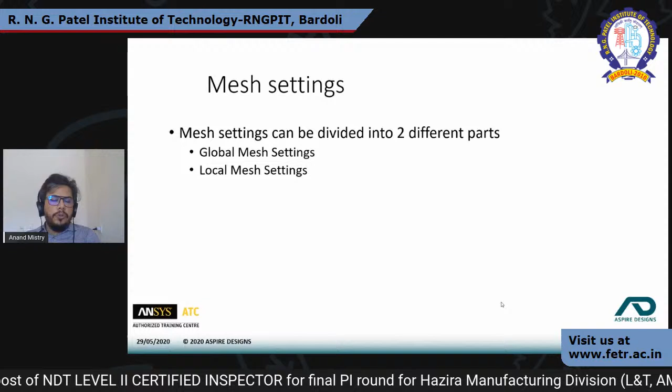We have it all. But as we see in industry, we have multiple components assembled in a single machine, and when the machine operates at a specific loading or speed, we don't know how it will react to that force or loading. To check that, we do the simulation process virtually in our computer systems based on different platforms like ANSYS, Abaqus, COMSOL. We have many.

So basically, what this software does is divide the whole machine or component into n number of specific small elements of known shapes, like triangular, hexagon, square, rectangular. What it does is solve it one by one, element by element. These single entities are called elements.

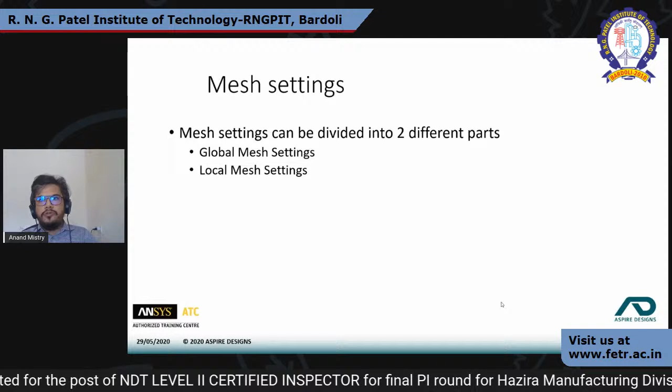There are different methods for different physics to solve it. If you are solving for thermal conditions, the meshing will be different. If solving for structural conditions, meshing is different. If solving for fluid conditions, meshing is different. So in today's topic, we are specifically focusing on the structural side - if you want to solve a structural problem, how you should mesh, how you should discretize the model so you can get a near accurate result for the simulation.

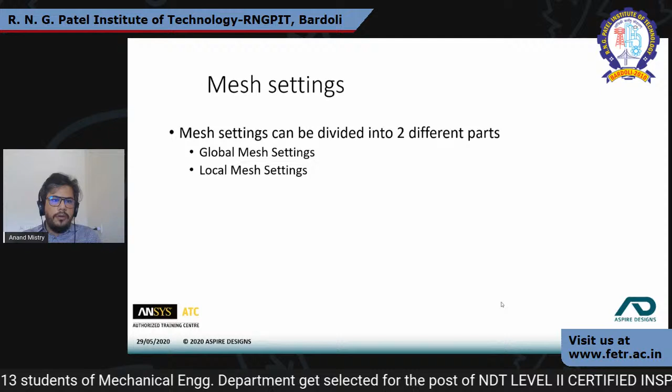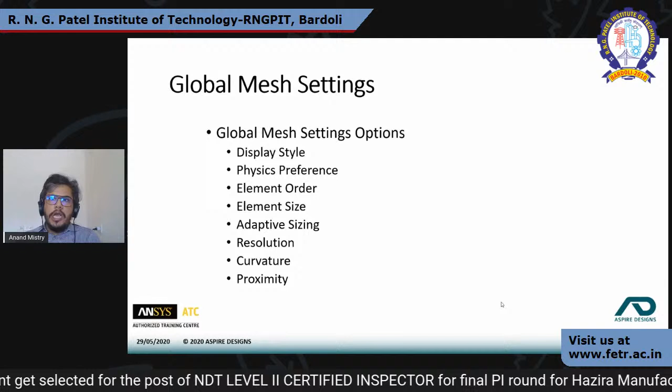In ANSYS, mesh settings can be divided into two parts: the global mesh setting and the local mesh setting. In global mesh setting, multiple sub-options are there like display style, then physics preference. As discussed earlier, there are different physics and according to those physics, the meshing criteria changes.

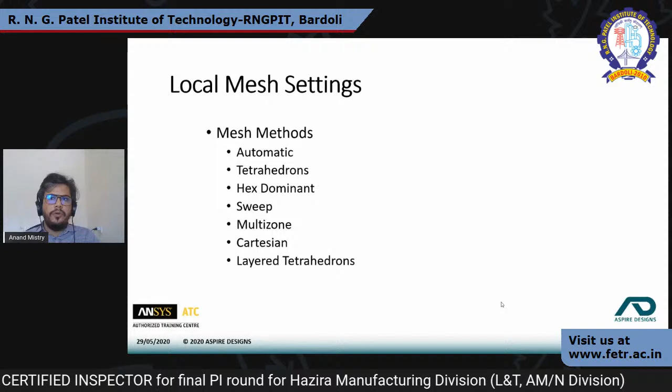Then element order, element size, the adaptive sizing feature, the resolution of adaptive sizing, then curvature and proximity. For local mesh settings, there are multiple methods available, which are individual commands that you can impose on the global mesh setting.

Once you have set up specific parameters for the global mesh setting, then you apply this local mesh setting to either the whole assembly, or you can go for a specific component, or a specific surface, or a specific edge, or to the minute detail you can control a specific endpoint or vertex also in the local mesh setting.

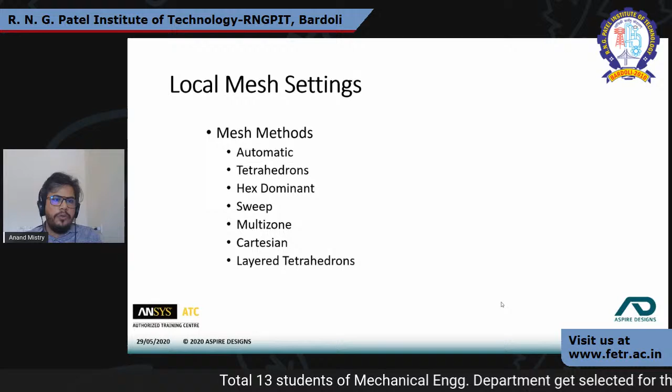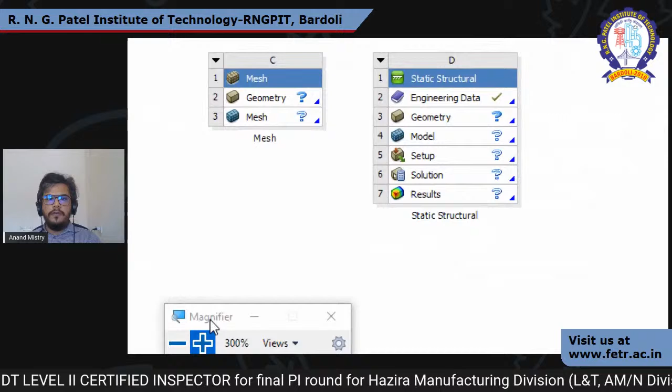Now we will move to the ANSYS window. As you can see, I have created specific different systems for the meshing procedure. How can we do that? If we take a specific static structural meshing and analysis system, you can see it consists of different parts joined together, and we have to follow them step by step. The first step is the physics that we are solving for.

In our case, it is structural, static structural. The second step is the engineering data. In engineering data, you define the materials which will be used in your analysis system, like aluminum alloys, structural steel materials, copper components, or brass components. So basically you define all the materials and their properties in this engineering data. Engineering data also has a specific ANSYS library available, and you can use ready-made materials from that too.

Then the third step is the geometry. Geometry has multiple options: either you can create a geometry in ANSYS itself, or you can import the geometry from external CAD software or CAD solutions that you might have. Like you have AutoCAD, you can import from that. You have PTC Creo, you can import from that. If you have Dassault Systemes SolidWorks, you can import from that too. You can import from Dassault CATIA also. If you have Siemens NX, you can import that too. So n number of possibilities are there in the geometry part.

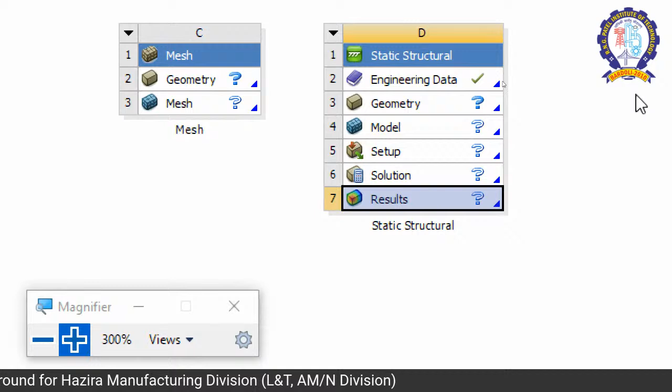After that, the fifth step is the setup. As you can see, a red arrow and a green arrow show that external loading conditions are being applied to the model. The green arrow shows that output parameters are also being defined in the setup — what results we need, whether stress contour plots, total deformation plots, or a specific factor of safety plot. So we have to define that in the setup step.

Then the next step is the solution. In solution, the ANSYS software comes into picture. In the background, it will solve all the mathematical formulations for our model, and it will solve the whole calculations.

After that, the seventh step is the results. Once the entire geometry and model is solved, then the result will come into picture, and in results we will post-process and interpret them — from which location it is failing, or whether our component is safe or not.

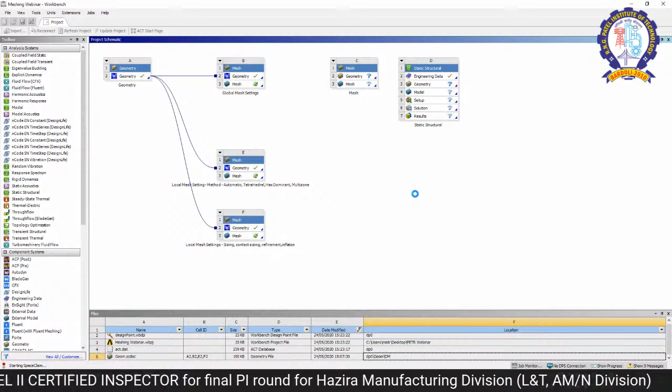So how do we start? Basically, we'll open a geometry window first. In the geometry window, it will open a specific modeling platform of ANSYS in which you can model your own entity. There are two main modeling platforms available in ANSYS. The first is the Design Modeler, which was the legacy platform, based on NX. The second, which we currently use, is called SpaceClaim. Space Claim is a direct modeler, and it doesn't have any kind of feature tree or history available for the commands that you do. Basically, a simple tool is provided to sketch and make it a solid.

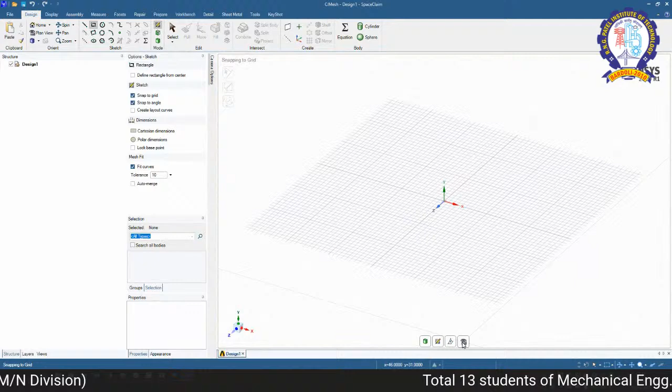Let's say I want to make two components, a cylindrical component and a rectangular box, on top of each other. So what we'll do is go to a simple rectangle sketch, go to sketching, and sketch a rectangle from its center point having specific values like 25 by 45, and press enter. Once that is created, it will be converted into a sketch.

If you look back, I'll go back one step. You can see we have a specific sketch entity available, and it's also showing in the curves tree that we have 4 lines available, and it's a closed sketch. So once it's a closed sketch and you have created independent lines, if you go to 3D mode, it will combine all those 4 lines and convert that closed entity into a surface.

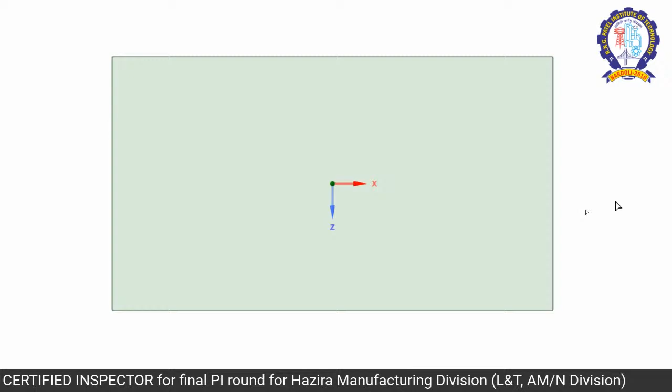So we have been going from 1D to 2D. First our sketch was 1D, only one dimension was there because we were sketching on a specific plane and no other parameters were there.

In the 2D, now we have 2 parameters available for this sketch. We have filled up a surface, so the surface has a height and a width.

Now if we go to the pull command, we can add a third dimension. We previously had the x dimension and z dimension available, and now we add a third dimension, the y dimension. So now it is a proper 3D solid. Once that is generated, you can see it will automatically convert that into a solid. So we have converted our first sketch into a surface, and from surface into solid.

So this is our first step. Now we can right click it and move it to a new component. We can name it as a rectangle.

Now again, I'll go to sketch mode, and in sketching I will select the top surface of the rectangle, and above the top surface I will draw a circle of a specific diameter. Done.

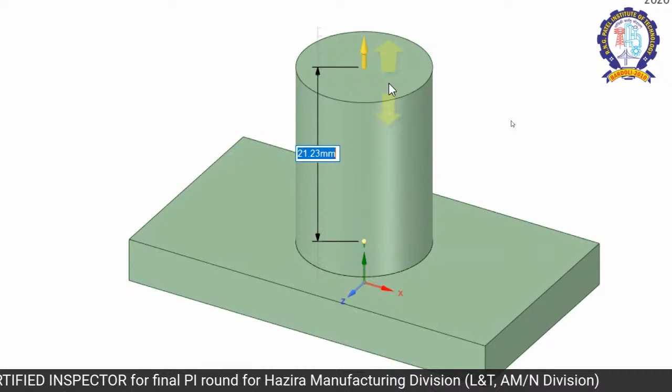Now we will go back to pull, so it will automatically go to 3D mode. We have a surface available now from the sketch, and we will add some dimensions to it.

For the sake of distinguishing the different components, we'll change the color of the entire model, so you can differentiate component number 1 and component number 2. This is our second component.

Now we'll move it to another one, that is our cylinder. So now we have two different components in our design, and you can see the icon has been changed to an assembly.

In ANSYS, you do not need to save the model once you are working in the ANSYS environment. Simply close that window, and it will automatically save the design and move that component to the next step, which is meshing. Now you can see there is a refresh button available on the meshing.

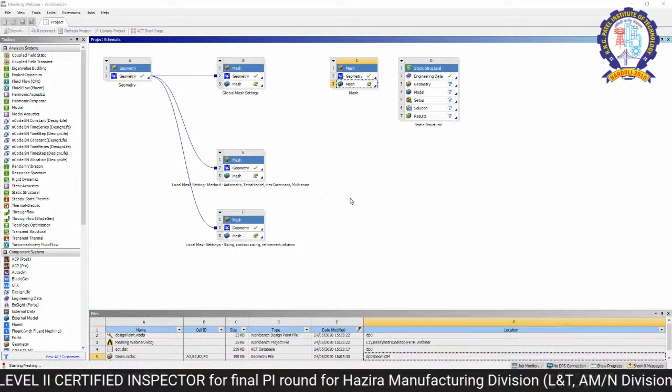So double click it, and it will open a meshing window. In the meshing window, we are going to do a specific task based on local mesh settings and global mesh settings.

So now, as you can see, we have different portions in our window. First window is the outline one. In the outline, you will see what things have been generated for my project. Then on the right hand side, you have a detail column, and at the top, you have a context toolbar.

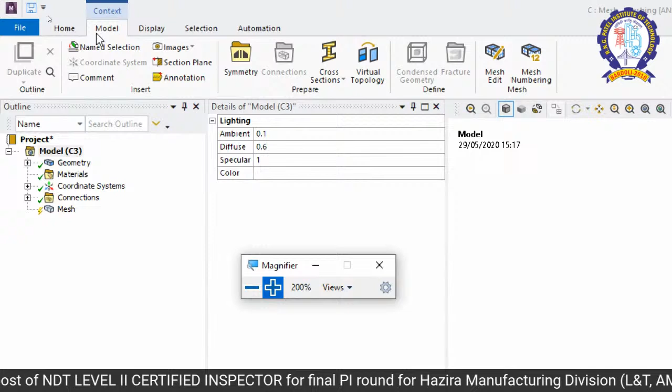This toolbar is automatically updated based on the option you choose. If I choose geometry, then I will have all the commands of geometry. If I choose material, then I have the options of material. If I choose the coordinate system, then I have the options of coordinate system.

And if we go to mesh, then we have the options of mesh. As soon as I click mesh, I have the specific details of the mesh window in this column. So all these settings, the details of mesh, are called the global mesh settings.

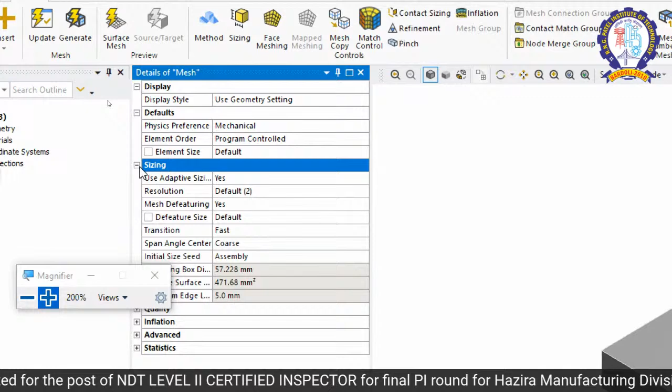As we have seen previously in the slide, the global mesh setting has options like display style, physics preference, element order, and element size. If we drop down, we have more options for adaptive sizing, the resolution of adaptive sizing, and mesh defeaturing sizing. Then if we close the adaptive sizing, we have two other options: curvature and proximity.

Don't worry, we'll go one by one. So first we'll check what options are available in the global mesh setting. The first one is the display style.

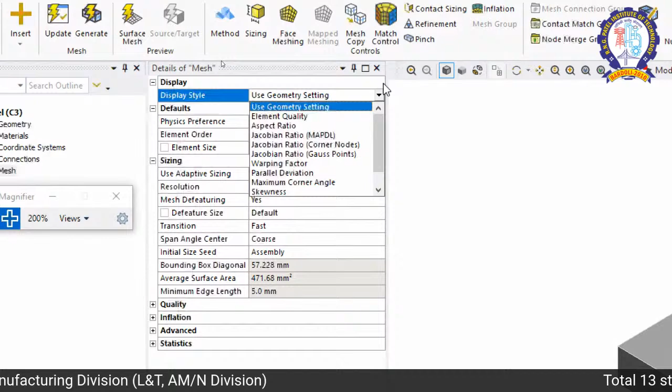If we click the display style, we have a drop down menu which will show the different element quality criteria available to display. So if we took an element quality option, for that we have to create a mesh.

So simply we will generate a rough mesh here. As it is being generated, now you can see the element quality is being shown, as we have chosen the display style option element quality.

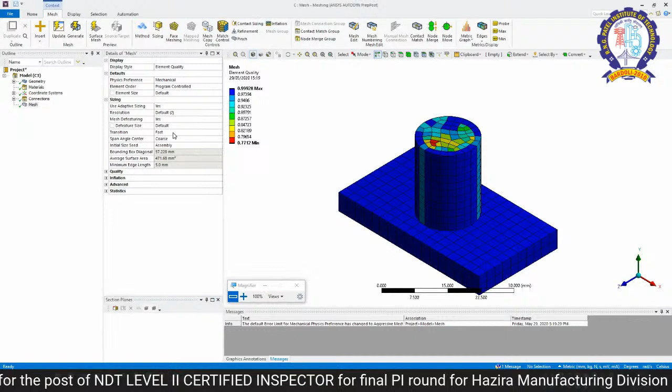The quality shown in blue, as you can see, is 0.99928, the maximum quality available, and the worst quality available is 0.77, shown in red. Generally we tend to go for the highest possible element quality achievable for our model, and we can apply different mesh settings based on global or local mesh settings to achieve a maximum number of elements having higher quality. Then the second option is aspect ratio.

You will see all these things in detail once you know the theory of it. Just to overview it, we are going back to the geometry setting. The first thing in the default setting is mechanical.

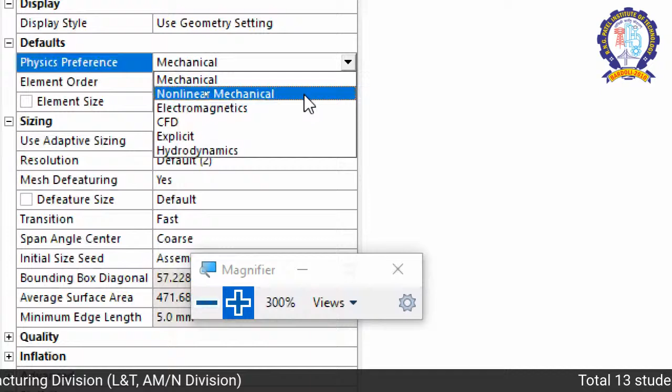What is that? We have different physics available at our disposal, like mechanical, then non-linear mechanical. Non-linearity can be of different types, like material non-linearity, external loading non-linearity, and contact non-linearity. Multiple non-linearities are possible, so if you are solving a non-linear analysis, you have to choose the physics preference to be non-linear mechanical. Then electromagnetics is also there.

If you pass a current through a specific channel and you want to see the magnetic properties of it, how much strength of magnetic field is being generated, or in which direction the magnetic field is rotating, you can check that in the physics called electromagnetics, and you have to change the physics according to that.

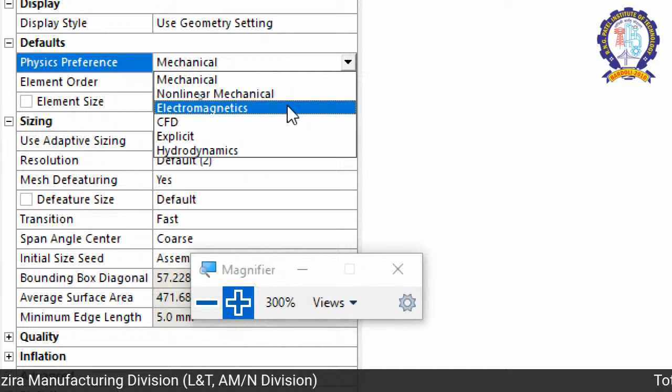Then CFD is there. CFD means computational fluid dynamics. So if you are going for an internal flow inside a pipe or an external flow, like wind tunnel testing of some external body of a car or any other entity, or specifically analyzing a blade profile or an aerofoil profile, at that time CFD will be helpful.

Then explicit dynamics. The explicit physics is specifically used when you are crashing something, breaking something in the simulation. At that time, explicit is used. And the last one is hydrodynamics, which is basically a combination of CFD and mechanical.

So for our simulation, we are going for the mechanical. Then you have an option of element order. Element order are of two types, linear and quadratic.

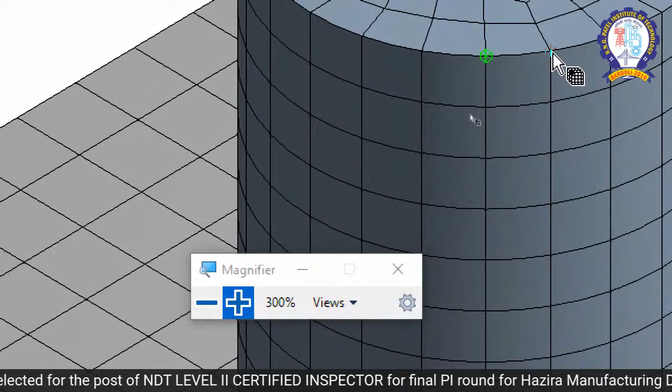The linear element order means if we choose a specific element, only two elements are given per entity, first and second. But if we go for quadratic element and update the mesh, quadratic element creates two endpoint elements but also one midpoint element too. So if you are using this analysis for higher degree of accuracy, you will need all three elements for the simulation to capture the geometry properly.

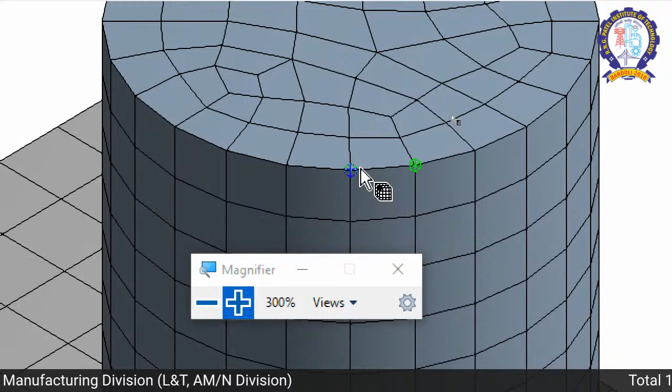Now the next is element size. Element size is the maximum possible size available for our model, in which we want to discretize it. Like for this analysis, if we choose a 1mm element and generate the mesh, a maximum size of element of 1mm by 1mm by 1mm will be generated, not more than that.

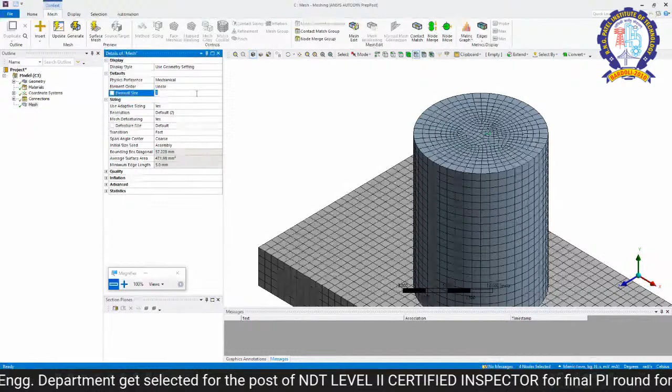This is the maximum possible element size given. Elements can be lower than 1mm if it is possible, but not greater than 1mm. This is the maximum possible size which we can give. If you want to go back to default, simply put 0 and press enter, so it will automatically go back to default value.

Then we have the option of adaptive sizing. The adaptive sizing has been using the ANSYS algorithm for creating the finite element meshed model since a long time. And as the ANSYS version increases day by day, a new update arrives, and this adaptive sizing feature gets much more capability to analyze and mesh the model effectively.

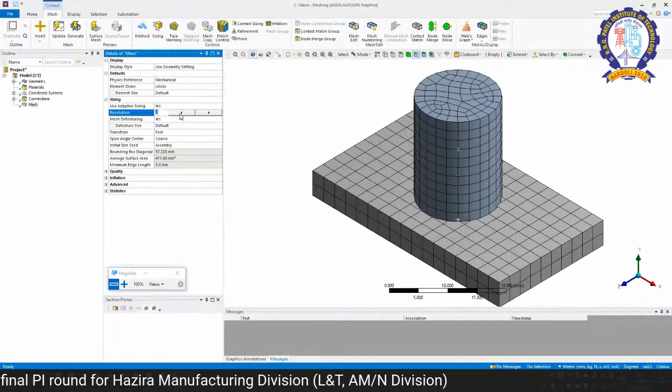The adaptive sizing can be controlled based on the resolution. Resolution minimum can go up to -1 and maximum can go up to 7, which is the maximum resolution available. What resolution actually does is check the model automatically, and depending on the model geometry, try to create a finer mesh. It takes control of element size and element type in its own hands, and tries to give us the best possible mesh for our model.

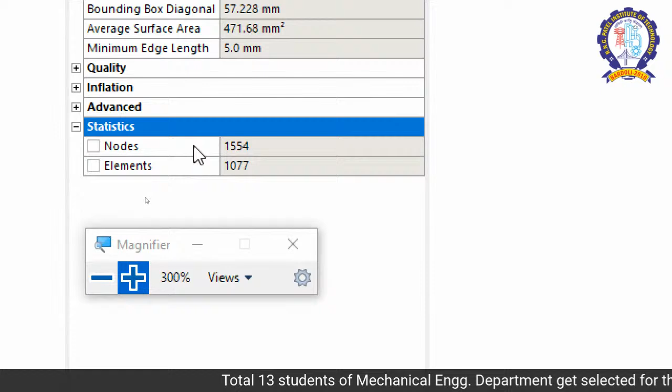So if we choose resolution 7 — but before going to that, the default statistics of the element is 1554 nodes and 1077 elements, which were generated when we have the default setting available.

Now going from resolution 2 to resolution 7, if we generate the mesh again according to the new refinement model, you can see it has created a more finer mesh, with more nodes and more elements. So it will increase the accuracy of the simulation.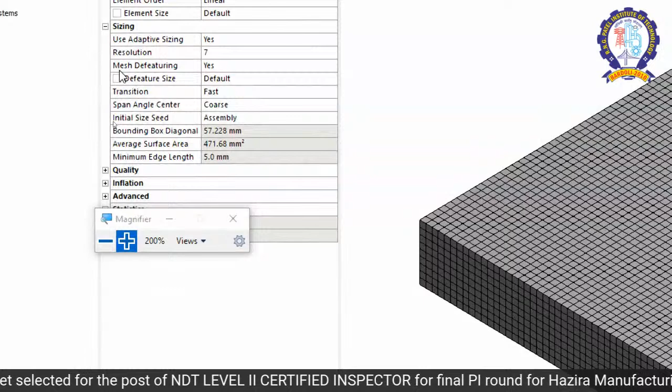Okay, so this is our adaptive sizing procedure. In adaptive sizing, you have multiple options like mesh defeaturing. Defeaturing means if you have previously introduced some features into your model, like fillets or chamfers, and at the time of meshing you want to ignore those entities and simplify the model so a higher quality mesh can be generated quickly, the mesh defeaturing feature is utilized.

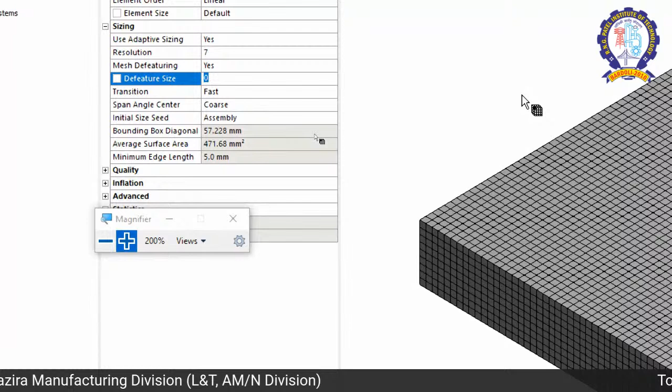So if you have created a chamfer of edge length 4 mm and you want to defeature it in the meshing criteria, in defeaturing size you have to give a slightly higher value than that 4 mm, like 4.1 mm. Then the ANSYS meshing engine will calculate that edge length up to 4 mm and give the command to the mesh engine that this entity has to be neglected at the time of meshing. Okay, that is our defeaturing.

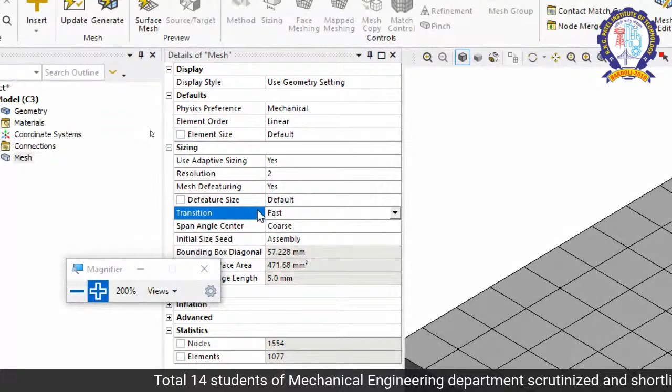Now if we go back to our main default resolution, we can see the transition detail. In transition, the growth of element size from a small element to a bigger element is called the transition. If the transition is fast, the growth will be higher and the element will grow from smaller to bigger size very quickly. If we set slow transition, it will create multiple elements before changing to a higher size.

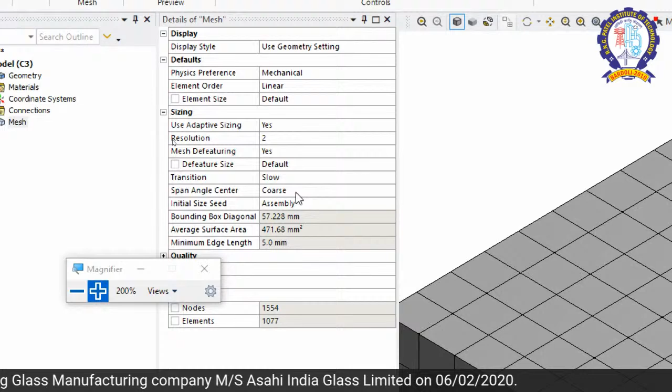Then we have the span angle. What is span angle? There is a specific angle between the edges of the element, because the vertices of the element have some angle between them. To increase this angle we use the coarse span angle feature, and to reduce it we can use the fine span angle center. This will reduce the element degree and give us a finer element with a low span angle.

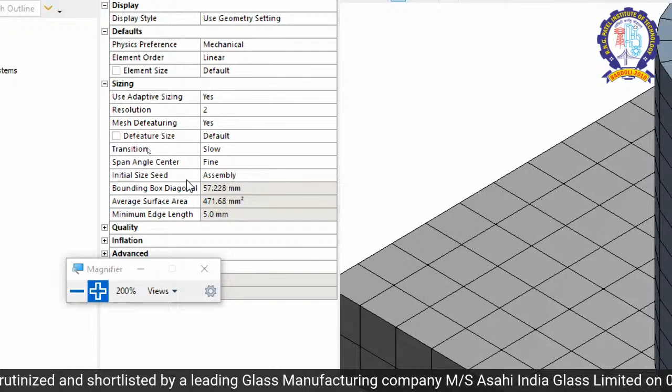Then we have an option of initial size seed. This feature works when you have a large assembly of like 1000 or 2000 components. At that time, some elements are having values in meters, and if you are using bolting or fasteners, those might have a value of M16, M18, or M20, like 20 mm. Compared to a meter-scale value, like a 2 meter component converted into 2000 mm, versus 20 mm, there's a huge difference. So what this meshing engine does is automatically compare multiple components, what is the size of one compared to another, and based on that it creates a mesh for that entity. This is our initial size seed. I'll show that option in another example.

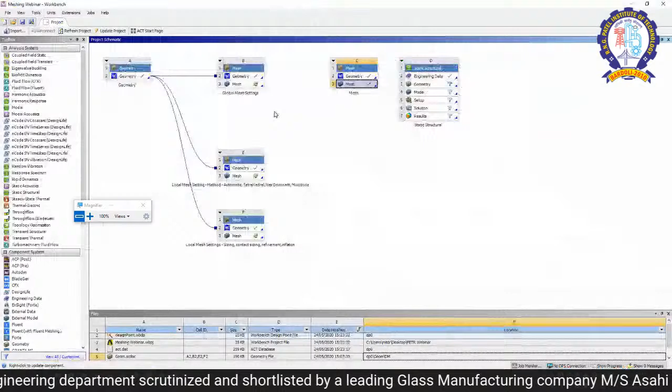So we'll move on to another example, which is specifically created for the global mesh.

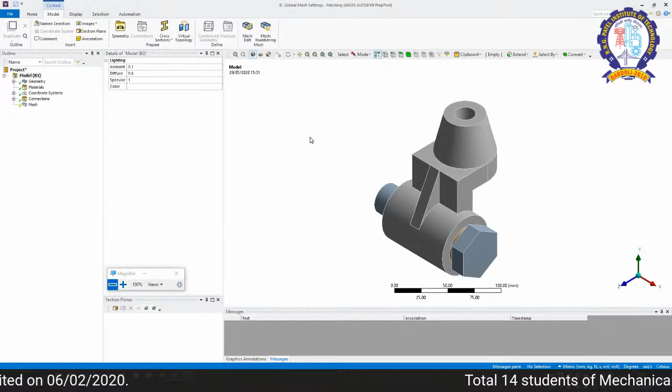So now as you can see, we have a component with a bolted assembly having one main body, a bolt, a left side washer and a right side washer. As you can see in the details, if we go to body we can check its properties, and we have a specific volume of 3.33 into 10 raised to 5 millimeter cube. Compared to that, if we go to a washer body, it has a volume of only 2749 millimeter cube.

So if we go to mesh, go to sizing, and initialize the seed based on assembly and create a mesh, it will create a mesh of the geometry compared to other bodies available to it. So the mesh sizing on this body has been a coarse mesh.

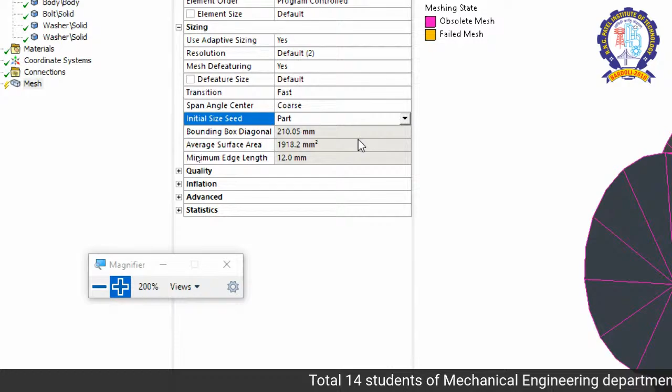But if we change that based on part, what it will do is scan part by part for the assembly for the initial mesh element sizing, and mesh it according to that.

So if we go on based on part, now you can see it has divided that element into two different elements based on the part. And you can see also over here, it has created two different parts for the same thing. So this is basically a part-based seeding, or what we say assembly-based seeding.

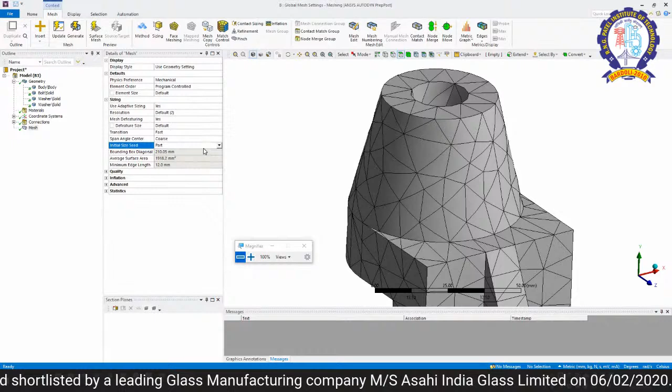Now for higher quality of mesh, we can change the meshing method based on adaptive sizing on or off. If we turn off the adaptive sizing, we have two options. The first option is capture curvature. As you can see in our model, we have a curvature over here, another curvature over here, and curvature over here. In short, any line which is not straight is called a curvature.

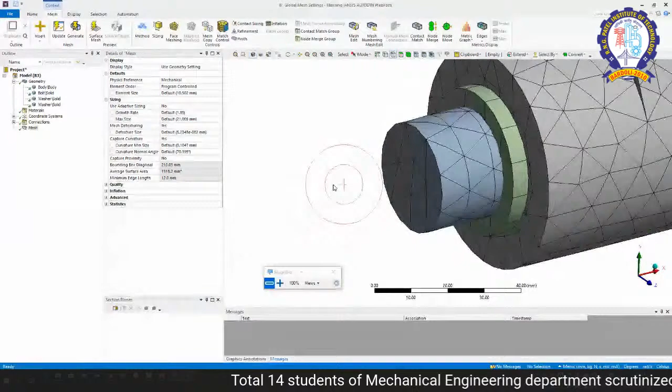So if we turn on that capture curvature option and generate the mesh, you can see the change that it has created more number of elements at the curvature location to capture that curvature phenomena properly. That is called the capture curvature option.

Then the second option is capture proximity. Proximity means if two components, two faces, two edges, or a face and an edge are close to each other compared to other sizing of the component, it will capture that phenomena and try to mesh higher, meaning densely in that location, to capture the effect of stress distribution or deformation distribution effectively. It will generate a higher number of mesh in that location.

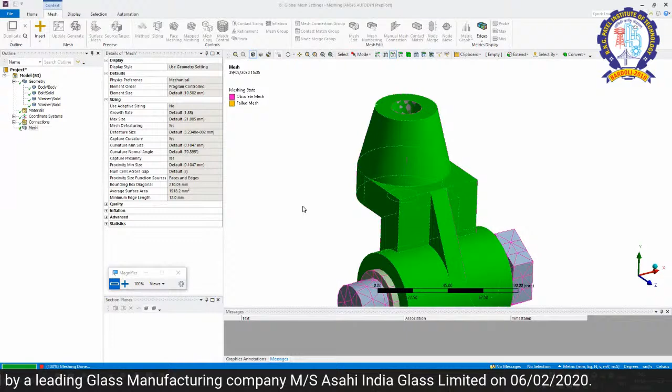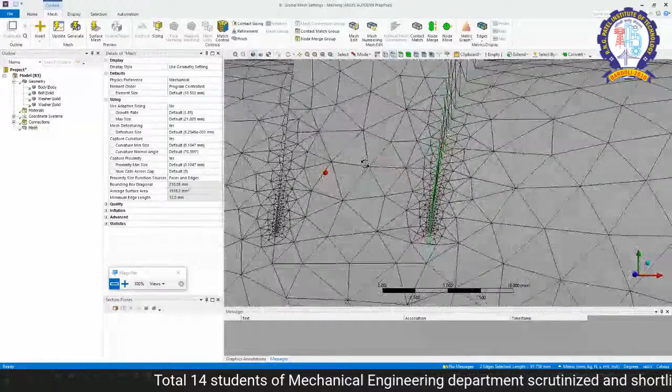So as you can see over here, we have one edge going down and another edge going down. It has created more number of elements in this region compared to the whole assembly. The whole assembly won't have much higher components, but whenever two edges or two surfaces get close to each other, it will create a finer mesh. That is also seen over here - two edges being joined together at this location, so it will try to create a finer mesh in that location. That is called proximity.

So these are the basic options of global mesh settings. Now we'll move on to the local mesh settings.

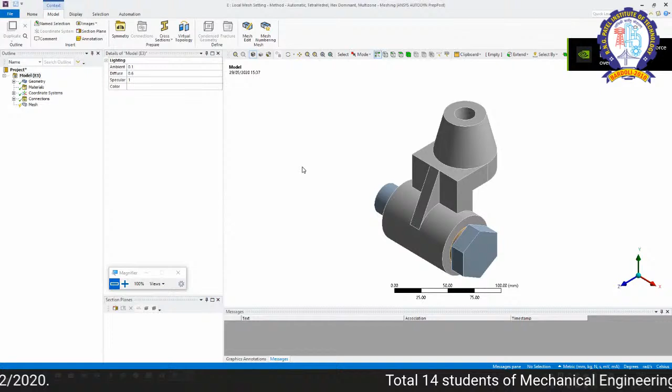I'll be using the same model for the meshing of local sizing also. So first of all, what we have to do is generate a specific rough mesh based on the global settings. And now we'll go to different criteria. For this part, we will hide all other bodies and target on this single body only, the bolt. As you can see from the global mesh setting, it has created some okay mesh, which can't be used in simulation as it has a very rough quality.

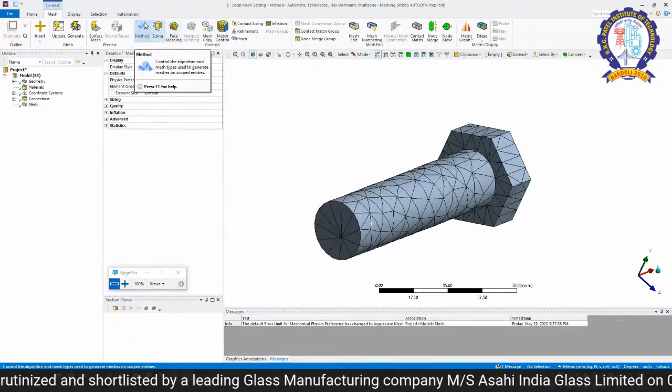So we need to refine that. For refining this entity, we have an option of local mesh settings in terms of local mesh control, as you can see in the topmost portion. So the first one is the method. In method, what we have to do is first specify which body we want to work on. Once we apply that, different methods are shown. The first one is automatic.

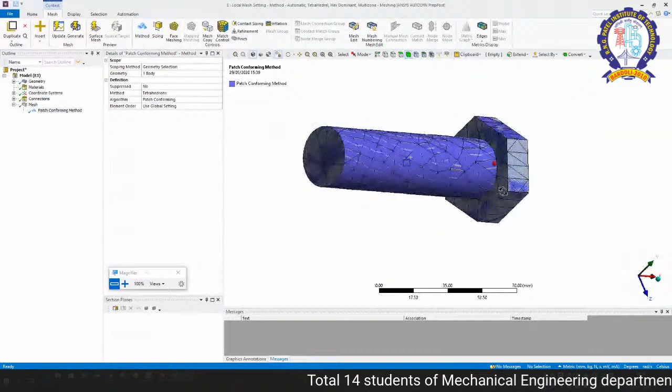What automatic does is the same thing as adaptive meshing does in the global settings. Then we have a second option, tetrahedrons. What tetrahedron does is try to create a triangular mesh for that body, if the body is being generated as a hexahedral body. Then we have the second option of hex dominant.

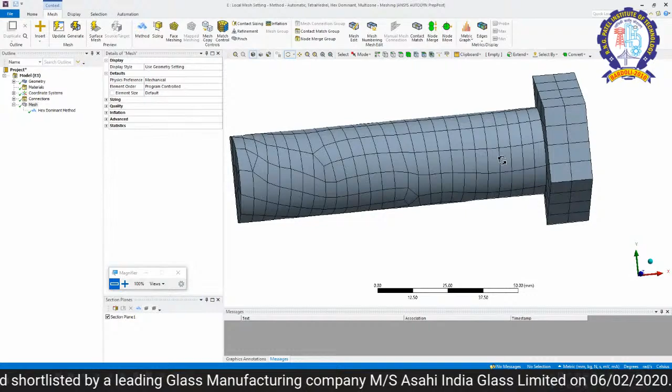What hex dominant does is try to merge the entire body into hexagons, meaning square elements. But it is not recommended to use this, because if you go for hex dominant meshing, the elements generated inside that body will cause rupture, and these are very bad quality elements. If you see elements from the outside, it looks good and nice, but if we see the inside elements, all elements have been ruptured. So it is not feasible and not advisable to use hex dominant mesh unless it is required.

Then we have an option of sweep mesh. What sweep mesh does is the same thing a sweeping entity can do. For the sweep mesh, you will go to the washer part, because the washer part will be easy to sweep.

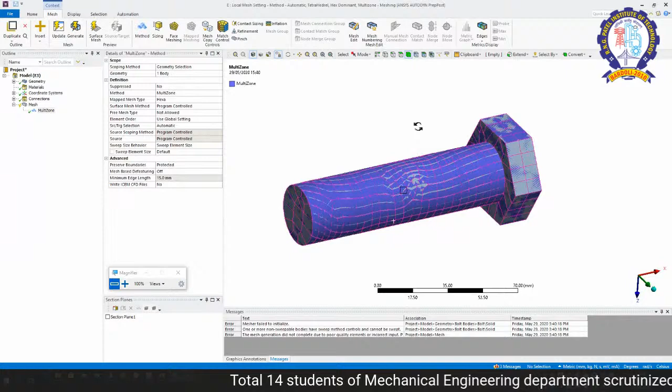Then we have an option of multi-zone mesh. Multi-zone mesh is generally a very good idea to mesh a complex component. So what it will do is divide this bolt into two parts - the first one is the cylinder and the second one is the hexagon. It will mesh it independently, and then join the mesh of the two entities.

So if we update the mesh of this entity, then you can see a single entity mesh of the cylinder is done, and a single entity mesh of the hexagon is done. And now, as you can see from the surface, it has directly created the same mesh elements on the bottom side.

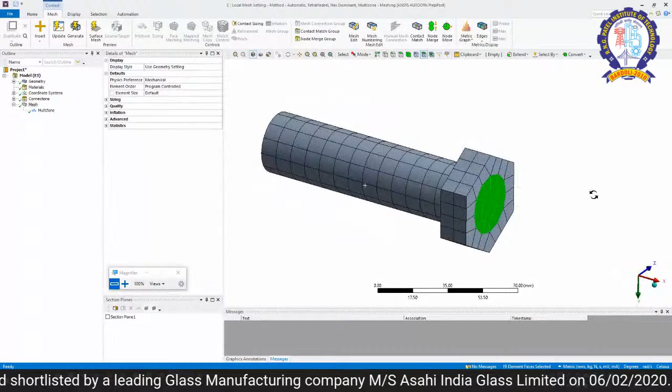So what it does is it will split up the body into known components which are easier to mesh, and then it will create a finer mesh for the body with a higher quality of mesh. As you can see, this mesh quality is way higher compared to the hex dominant, with uniform elements inside as well as outside. So it is better to use a multi-zone mesh. Okay, this is our first

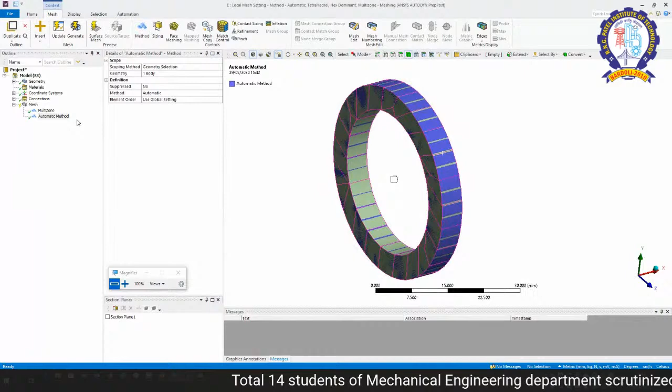local mesh setting, which is called method. We'll show all the components and choose method specifically for the washer body. Now we'll hide other components, and in that method we'll go for the sweep option.

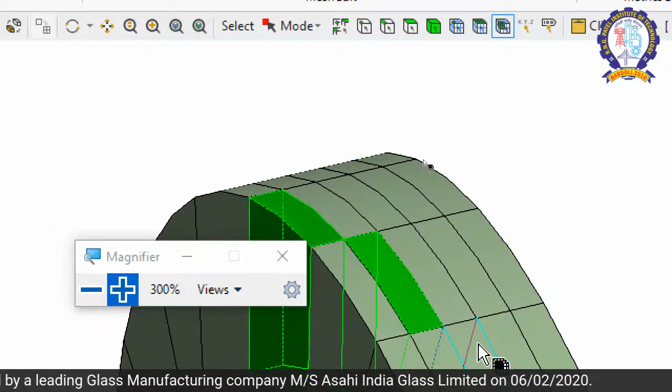What we will do in sweep option is divide this whole entity. As you can see in this mesh, it has not been divided into multiple components. But in sweep method, we have an option of number of divisions. So what it will do is divide that entity into the number of divisions that we provide here. If we give it 5 number of divisions, now you can see in the mesh it has created 5 different divisions: 1, 2, 3, 4, 5.

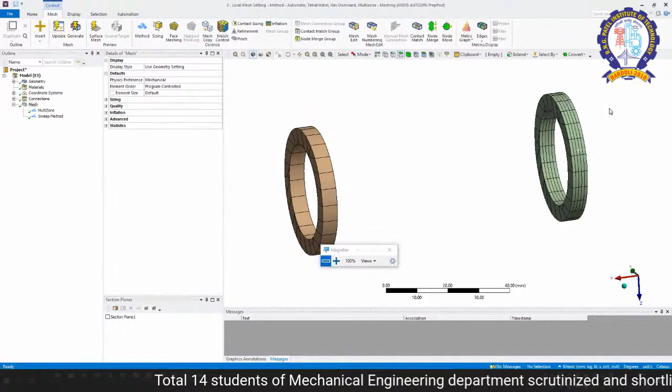So whenever you are generating a mesh for a specific body which is sweepable, you know that this face is directly being swept to the other side. At that time you can use the sweep method and give the total number of divisions, and you can have a finer mesh compared to the mesh generated without the sweep method. You can see that option over here. So the green body has a sweep method with 5 number of divisions, and the brown body doesn't have any kind of control. But what we can do is add sizing to it.

Now this is the second local mesh setting, which is sizing. What sizing does is it can be divided into a number of selections. If you have multiple faces selected, the sizing will convert into face sizing. If you have selected a number of bodies, it will convert to body sizing. If you have selected a specific edge, it will convert to edge sizing. And if you have selected a specific point, or what we call in ANSYS a vertex, it will convert to vertex sizing.

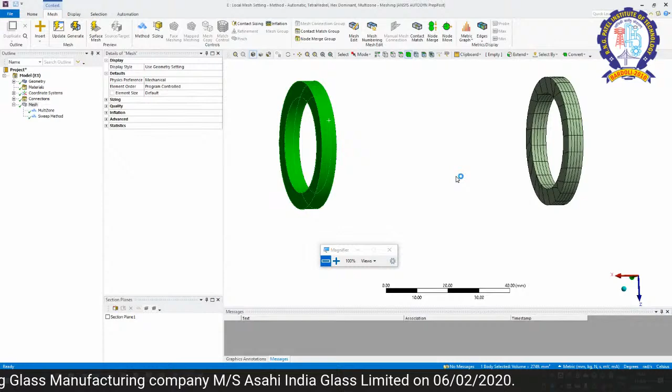What we'll do is select the whole body, go to sizing, and select the sizing. As you can see, it has converted that into body sizing, and now in body sizing we can specify the mesh size for it. So we select the body and generate the mesh for that body with a body sizing of 0.5 mm. Now you can see our entire model has an maximum element size of 0.5 mm, and it won't affect any other body in our whole assembly. It will work only on the single body that we have selected.

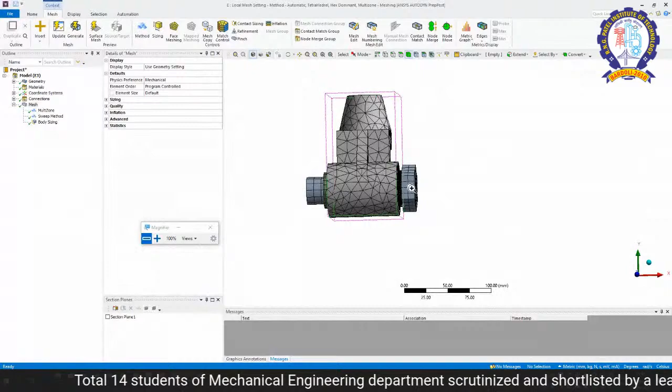Okay, so we can try again for our top entity also, applying a method for this body to be a multi-zone model. Multi-zone has failed, so delete it. Then we can apply a body sizing. We have another option, like if you want to go for 5 mm elements and mesh it. Okay, now we have a better mesh.

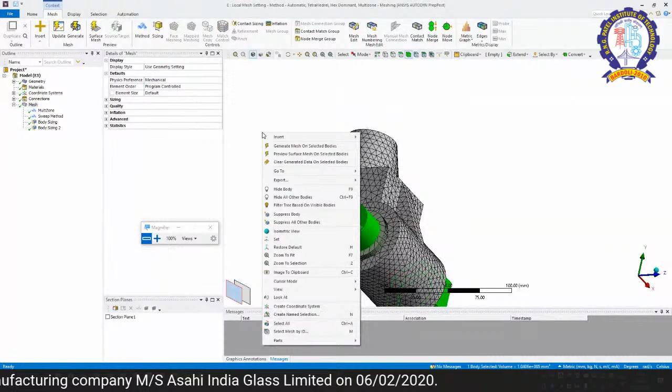Now if we go again to our bolt specifically, as you can see, the cylindrical entity elements are not arranged properly. So you can add one more local option called face meshing. We select the face, apply, and generate the mesh. What it will do is try to arrange the elements properly. Now you can see it has been arranged properly.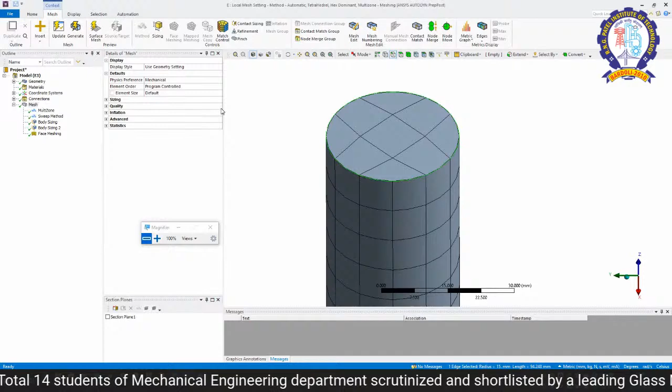But only 1, 2, 3, 4, 5, 6, 7, 8, 9 elements are there in the circle. I need much more refinement. So what we'll do is go to edge sizing, select the edge, and click sizing. Now as you can see, we have an option of edge sizing, and in that we have an option of number of divisions, specifying how many divisions this circular entity should be divided into.

So let's say 20 elements, it will show you a preview of 20 elements. Okay, let's go a bit finer, 40 elements. So it has been divided into 40 different elements, and then we generate the mesh.

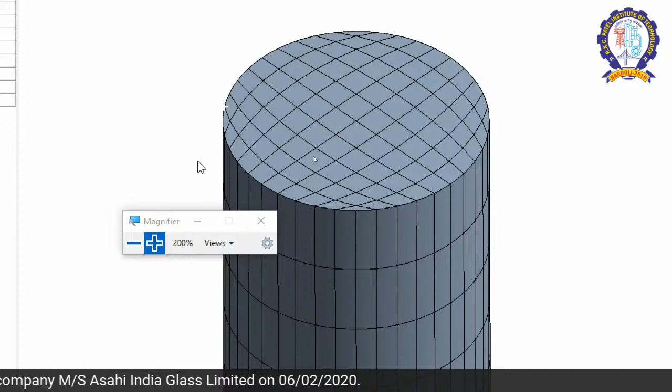Now you can see it has a specifically mapped mesh which is being arranged properly, and it has 40 divisions throughout the body, and that will continue on the top side also, as you can see over here, because we have created a multi-zone model for this one.

So it will create a multi-zone model mesh at that location also, and a specific edge sizing of that side also. Now we'll go to contact sizing. If we see in this location, there is a contact between the bolt surface over here and a washer surface over here.

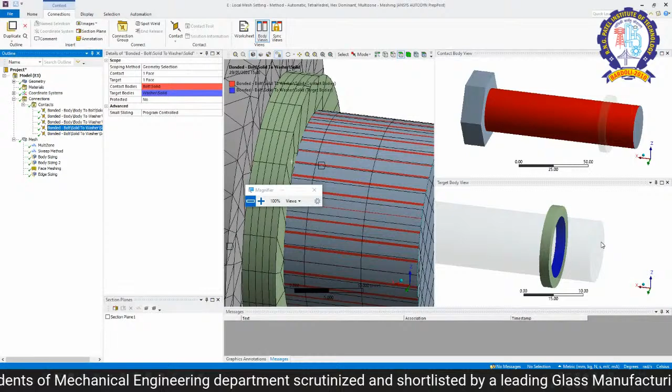So if we go to contact, we'll rename it based on definition. You can see over here there is a connection of bolt and washer, and there is a connection of bolt and washer over here. So now we will drag and drop that bolt and washer connection to mesh.

So it will create a specific contact sizing, and we'll hide all other bodies. We'll take only the bolted body, and in contact sizing we can define the element size, like 0.1 mm or 0.5 mm will be great, and generate.

Okay, so once that is generated, it has created this entire surface with 0.5 mm. Okay, if we check another bonded connection between a washer, okay, show all.

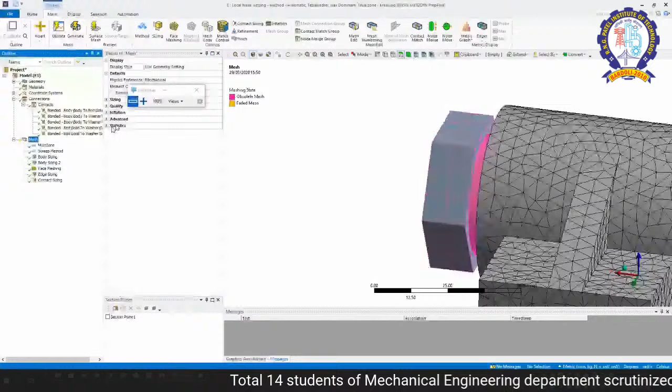Okay, this body has some contact over here, so we will delete this contact sizing and do another one, this one, to be contact sizing, and sizing to be 0.5 mm, and generate.

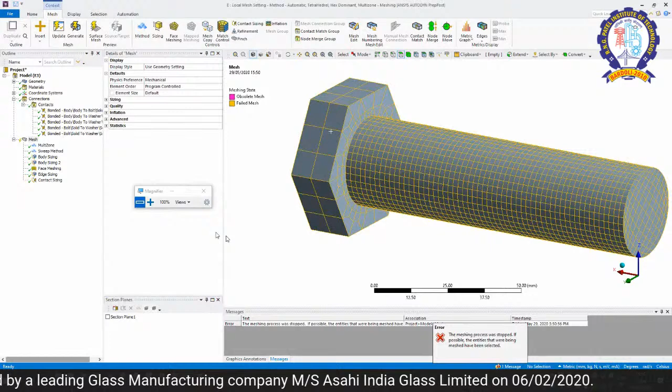I think it will take some time, so let's change the contact sizing to 1 mm.

Okay, done. And now you can see the element size is being gradually decreased when there is a contact appearing. As you can see over here, the elements are getting smaller and smaller once it reaches the contact surface, and the contact surface has the finest element possible given based on our element size.

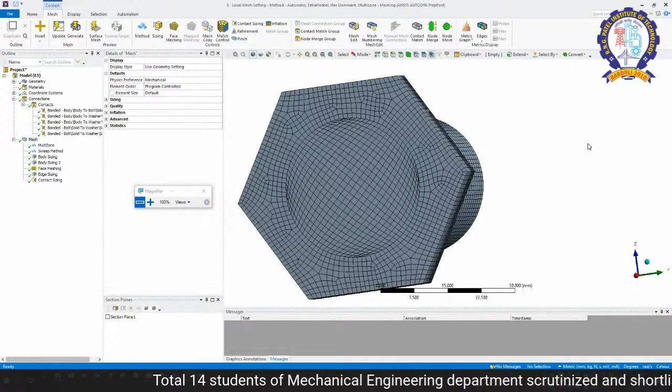Then you have another option also: if you go to model, and if you want to divide a specific circular entity into n number of elements, you can always go to sizing, edge sizing, and set number of divisions to 50, and generate it. So what it will do is generate 50 elements on that periphery.

Again, we can use edge sizing for multiple edges also, and it will create a uniform mesh between them.

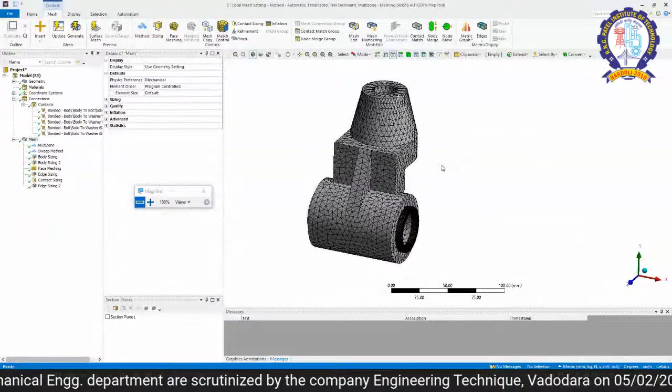Okay, so these are your local options. Much more options are available when you are doing meshing in detail, like refinement, adding mesh control, then you can use face meshing for the mapped mesh, and you can use sizing for body as well as we have used over here for body. You can use it for edge also.

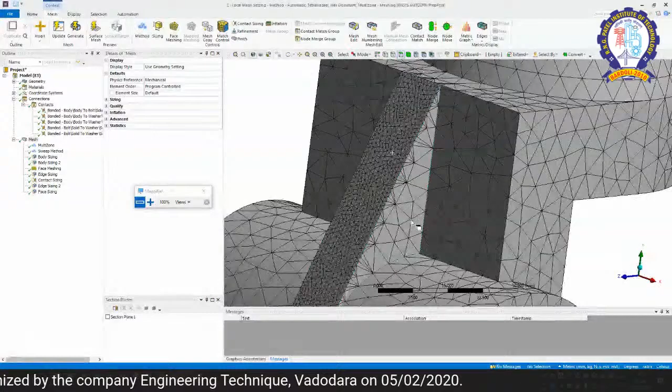If you use a specific surface, okay, over here, that thing is being converted to face sizing, and you can define a specific element size for that face, and it will try to mesh it with that face sizing of 1 mm elements as we have described, and it will gradually increase that element size throughout the body. You can always put a cut section on it and check the elements being generated from lower side to higher side.

Okay, so these were some of the options that you can add and create a mesh for your analysis. Back to you, sir.

It was a very informative session. So there are some questions related to this meshing. Can you hear me, sir? Yeah, I can hear you.

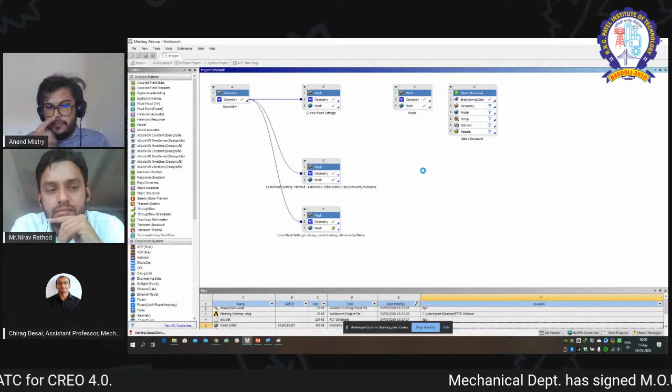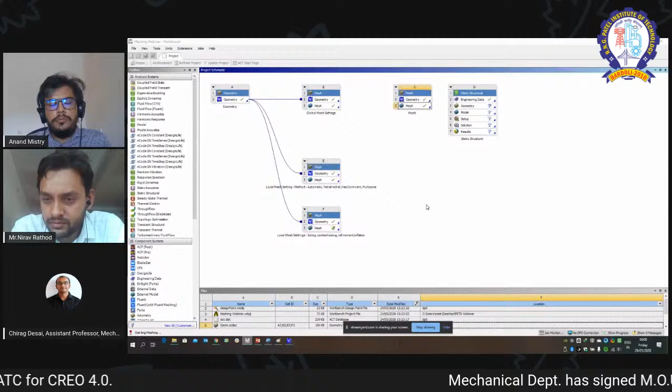Now we have two components here: the first one is the cylinder and the second one is the rectangle, and we have meshed it also. Let me open that as well. Okay, this is our model which we have meshed.

As you can see, there is no node connectivity between the two elements—each component has independent nodes which are not connected at all. At that time, when ANSYS imports this entire geometry from the modeling perspective to the meshing perspective, it will automatically create a contact region between the two bodies, and that will be a bonded one.

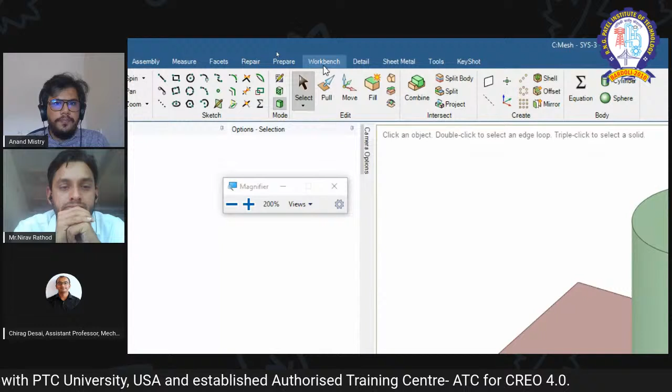But if we go back to our modeling options, in modeling you have an option called Workbench, as you can see here. Visible? Yes, sir. So in Workbench, you have an option called Share.

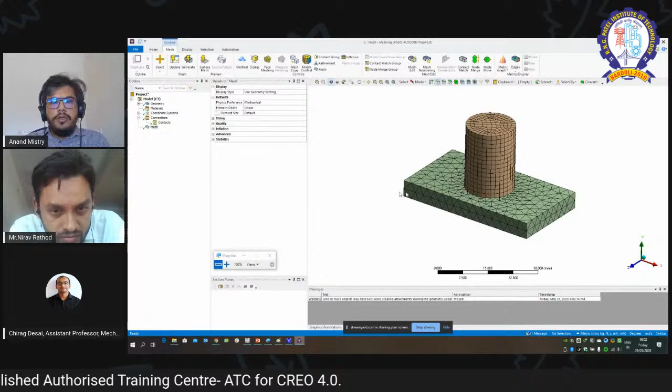Okay, what share does is it will check the model for sharing surfaces possible. So if two entities are sharing a common surface, then it will share those topologies. And now if I go back to mechanical and refresh my model...

Whenever you require a node to node connectivity between two components, you need to share those bodies. And whenever you are not required to connect it node to node, you can simply unshare those bodies, or keep it as default, and it will create a specific bonded connection between two entities.

So for various connections like frictional or no separation connections, it is not required to connect the nodes, because frictional, rough, and no separation are basically nonlinear contacts. Nonlinear contacts can't have node to node connectivity because due to external loading conditions, the nodes will be moving with respect to each other.

Node to node connectivity can be defined up to a specific pinball radius circle, so that if two nodes come into that region, in that radius, that proximity will create a contact between two nodes. Otherwise it won't create any node to node connectivity. So whenever you are using nonlinear contact, you do not need to give node to node connectivity.